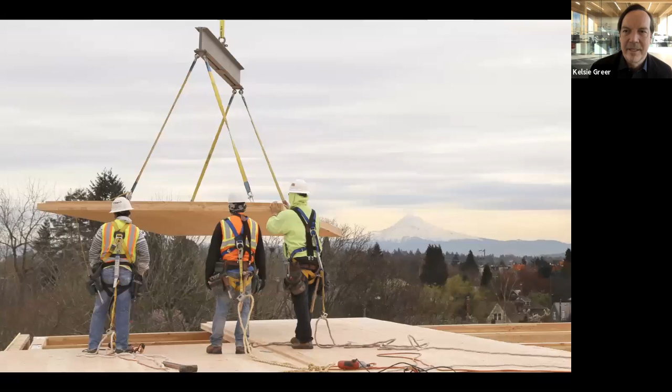This is our office that I'm in, you can sort of see the space behind me. When this was built, it was the first domestically fabricated cross-laminated timber office building in the United States. That was a really exciting opportunity for us to work in a material that is literally right outside our window. The panel you see hanging in the air is grown in the range you see in the distance, 3 hours south, fabricated and then shipped to Portland, where we assembled this building almost 4 years ago.

That connection between the kind of explosive growth we're seeing in cities and rural economic development is something that's really important to people in the Northwest, and I think is a big driver. When we think about mass timber, that's even sometimes bigger than the technical aspects.

For me, when I think about timber, it always sort of starts with the forests. The forests in many ways are a big important element to the future, and to some of the biggest challenges we face as a society relative to climate change, relative to rural-urban equity issues that I think we see in politics today, and relative to carbon sequestration.

Connecting the decisions we make around mass timber to sustainably managed forests, and really thinking about how mass timber, thought of in a wider context, in a global context, can address some of the biggest issues we face here relative to forest fires and more sustainable management.

This is something I've experienced very personally, not being able to go outside in Portland for 5 days because the air quality is just so terrible.

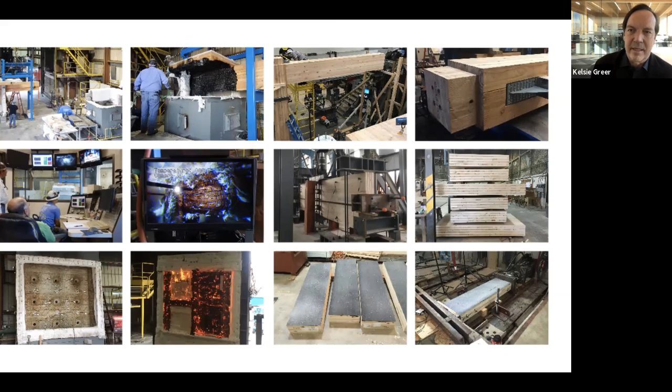And this is something that's now spreading across the US. I think one of the other things that was really important for us with Framework was thinking about this as a project funded by public and private partnerships. Like, how do we push the boundaries?

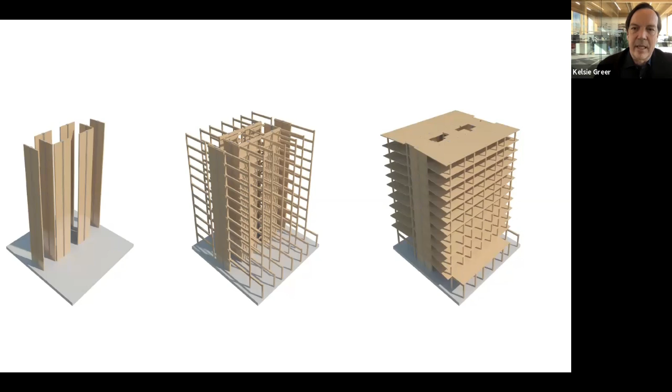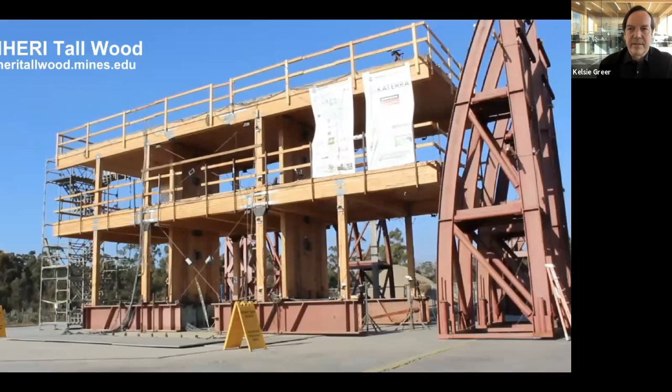One of the things specific to the West Coast was thinking about resilient design in timber. So we developed a whole technology, which we're still involved with right now. We're actually going to be doing another test next year, 5 years later, for post-tension resilient self-centering structures out of wood, because wood has a great, very high strength-to-weight ratio, and is a great way to address this issue in a major seismic zone.

And lastly, just that idea of a more virtuous cycle relative to thinking about forests, fabrication, construction. I think one of the big focuses that we've had lately is really thinking about the connection between mass timber and equity, and at this particular time that's really key.

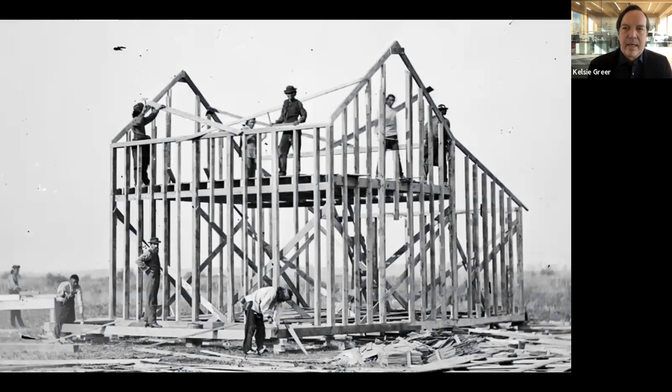I'll talk about that in one of the projects I'm going to go through. But for those of you that aren't in the US, I think it's really important to understand the context of timber in the US. So, in terms of where we've been, I've worked in Europe for a number of years and encountered the difference between the two. Actually, my mother's European, so I have that kind of connection there.

The U.S. timber tradition is quite different in that it's really focused on balloon framing, timber framing, and our entire supply chain is basically built around this way of building, starting in the 1830s. So we have almost 200 years of tradition and refinement of the supply chain relative to stick framing. It's very hard to compete against a stick frame structure using mass timber—it's actually kind of a different animal entirely.

But I think in the Northwest, in Portland, it's a really newer place, and within the last 100 years we've had old growth timber, so there was a different tradition, almost a massive timber tradition.

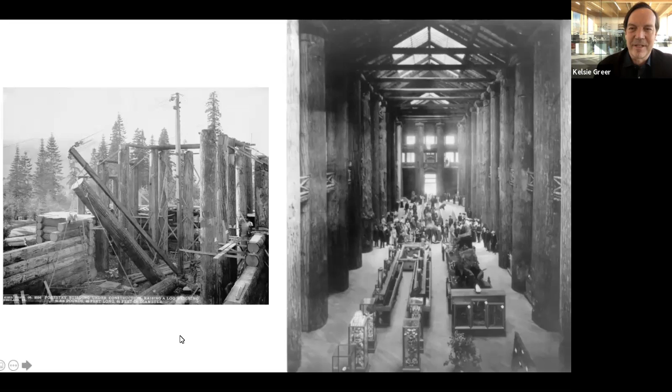But I think that tradition and connection to wood is, for me on a personal level, related to the fact that as I was growing up, I spent a lot of time at my great-grandfather's house. He was a scientist and built this residence completely out of timber. It was only a couple years ago that I found out—this is actually sitting on the East Coast of the United States—that he had purchased 2 boxcars of Oregon ponderosa pine, shipped them across the country, and had 2 Irish carpenters in Cape Cod put this house together.

But that house and the experience of it, the experience of timber, the connection—for me, you could still see the fingerprints of the carpenters on the ceiling and the walls—was really something that I think motivated us as we got into doing these buildings.

In the last 5 to 6 years, Lever's done, I'd say, 8 or 9 timber buildings. They're not all purely mass timber—they're always in a way hybrids, and that experience is really key.

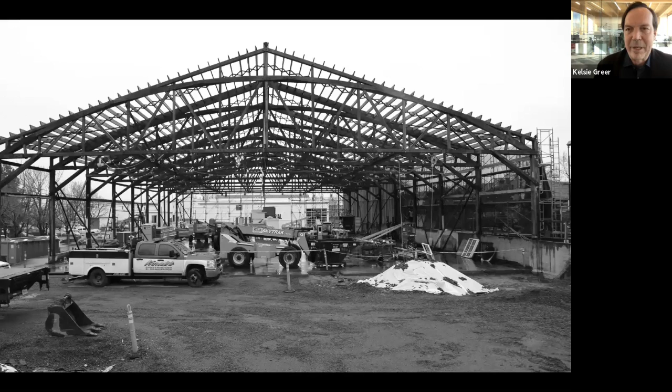So I wanted to step through some of the projects we're involved with that use timber in a variety of different ways. This is one we just completed about a year ago, which is really restoring one of those timber frame, stick frame buildings. These are 100-foot spans—2 warehouses in Portland, about 60,000 square feet total, around 6,000 square meters. I think what was fascinating to us is that the kind of structures you see in these buildings are really not necessarily achievable with the current code in terms of their lightness and efficiencies.

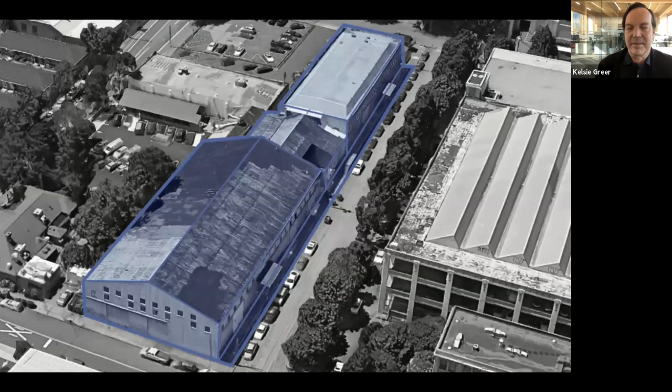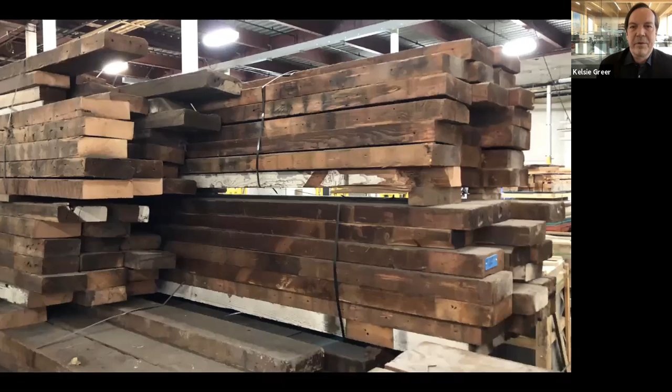So it was an opportunity to restore and put together this factory complex that was built completely based on efficiencies to manufacture hay balers during World War II. This building had been filled up with all types of mezzanines and things over its life cycle, over 60 years of work, and as we stripped away all the layers, we pulled out over 5,000 linear feet of virgin 4x12 timbers and more.

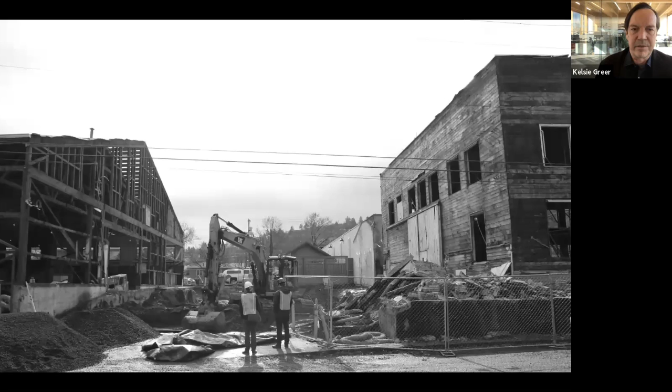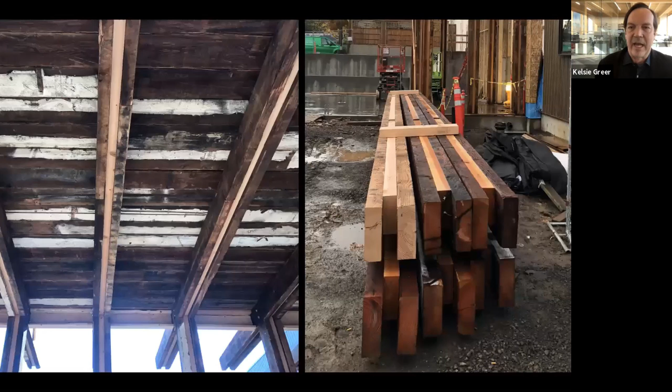And we thought, could we use that timber to rebuild a connection between these 2 structures? As we took the thing apart, we thought, could we take that timber—we had so much of it—and use it for the columns, the floors, and then actually remanufacture it on site? So we worked with our fabricators to create what's called a screw laminated timber structure—a simple mix and hybrid of one new solid piece connecting and bridging the other pieces together.

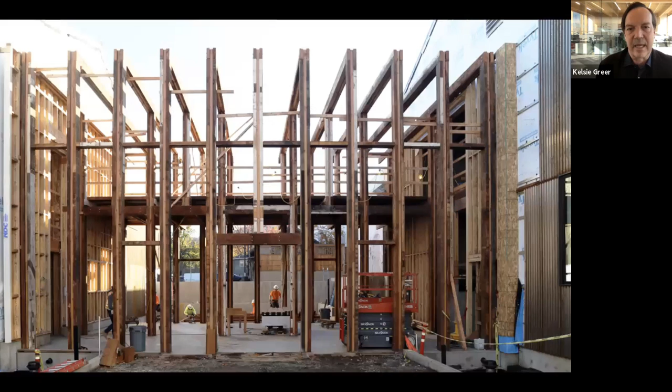So you can see this bridge connector, which is both contemporary and also sort of ancient. This is old growth wood that is being respected, and we put it all together. It had been painted white and black, and then we sandblasted it all in one place, just like we've done with the old buildings, but this is a completely new structure.

So some images of that, and then some views of this connected. For us, that idea of restoration—it was really great to hear that idea that you can do really incredible architecture within the context of existing buildings if you can rethink them. And I think there are so many timber buildings that have that opportunity.

That's something we're personally incredibly excited to explore, and we're doing that in a number of projects. This project, Red Fox Commons, is for us both contemporary and an opportunity to preserve these really phenomenal historic structures.

You can see the truss structure. One of the key things we did from a design point of view is really restore it. We added clerestory skylights for north light, and a mezzanine engineered on the lower level out of mass timber, then reworked the structure seismically with new fenestration. So it was a complete transformation, literally just the structure, and we're completely reimagining the entire experience of these buildings.

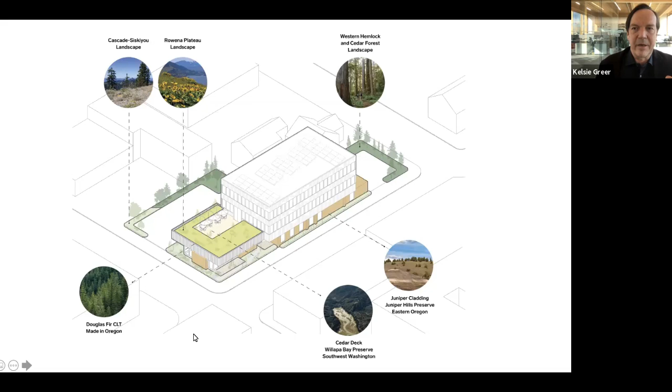That also played out in the facade and the landscape, where we were very targeted about how we could tell the story with the building. These are some images of that convening space being structured. We were looking at using domestic 7-ply CLT to span that space, and we had limited floor-to-floor heights.

On top of that is actually a roof deck planted with seedlings that come from their landscape. You can see the cantilevered CLT and the overall building as it stands. A huge amount of work was done to rework the structure, but you can get a sense of the scale.

Putting big, huge green roofs on top of cross-laminated timber is something we've been able to do and work through, making sure we have really robust waterproofing and thinking about expansion and all those types of things. That's a really big part of any kind of innovative endeavor, really understanding where you need to work technically on the details. So some of the views of that building.

One of the things we're always looking for in every project, and I think this is what it means to be an architect, is to think about what you can innovate on that creates a richer experience for the inhabitants.

In this building, one thing we were excited to do, which has been done in other parts of Europe, was to use this wood window wall, sourced originally in Oregon, structurally. The mullions actually support the 15-foot cantilever of the CLT. It's a structural element you couldn't do as easily with an aluminum system, so there's an integrated approach to working with it structurally.

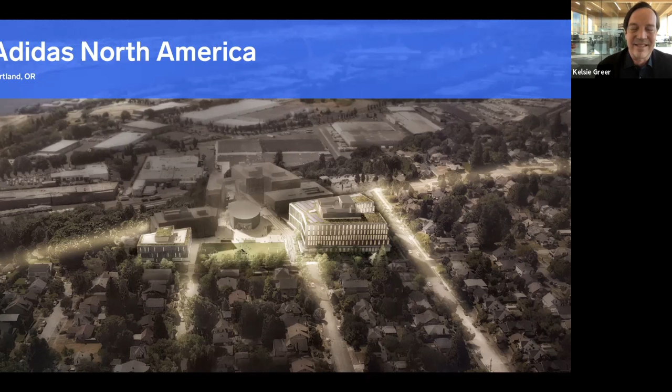It's really two buildings—you can see the north building on the right and the south building on the left, sitting on top. The south building sits on an existing parking garage, and the north building has a 600-space, 5-story parking garage underneath it. One of the key things Adidas wanted was to build this quickly and economically.

We won this project as a result of a competition. At the time there was interest in mass timber, but it wasn't decided that's what they wanted to do. Going through a series of studies, we came up with two systems.

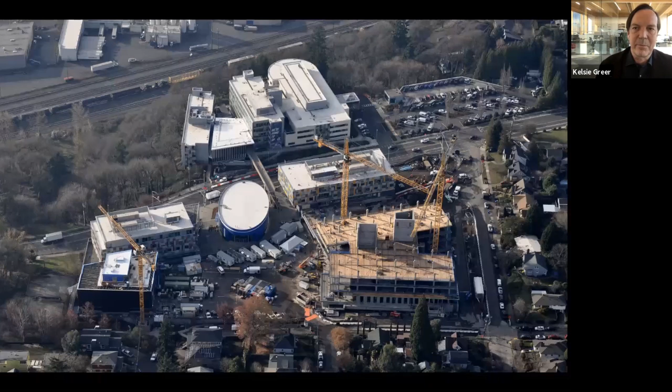On the north building, we came up with a hybrid system of precast columns and girders with a CLT and glulam cassette that fits into it. On the south building, because it sits on an existing parking garage, it's an all CLT and glulam structure that's lighter—you can see the section here.

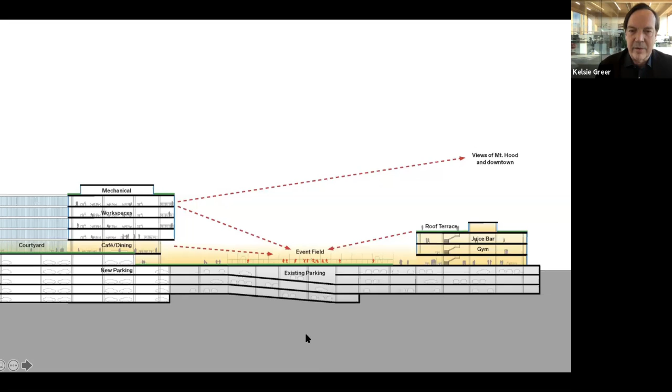The gray is the existing parking. On the right is the new glulam and CLT building, basically planted on the columns of the existing garage. On the left is the hybrid precast and CLT structure sitting on top of an all-precast parking garage—images help explain how that works.

One thing that came out of it is we were able to accelerate construction of this project by over 3 months by prefabricating all these elements, including the structure of the parking garage.

I think what we came to, working with our contractor Turner and the structural engineer at KPFF along with the fabricators, was a system we hadn't seen before—doing a traditional precast girder, plank, and column structure for the parking.

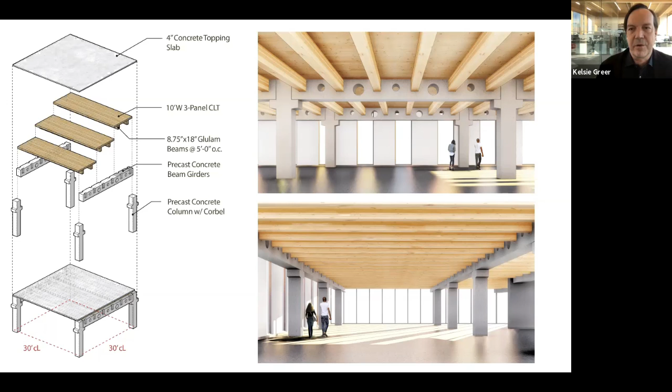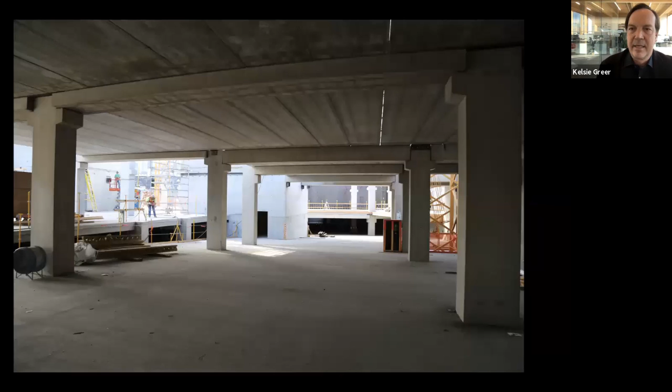And then when we got out of the ground, we said, well, could we generate and develop a custom girder that's perforated so it would allow us to run utilities through the structure and maintain this really honest and simple system. So you can see this is the kind of classic parking garage system with these big planks that's below grade. And then when we get up above, this is sort of what we have.

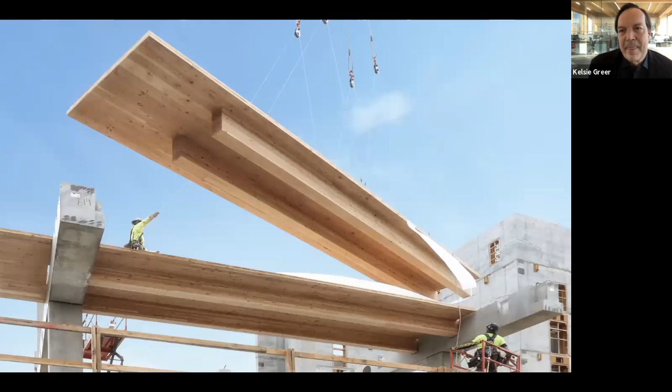This very straightforward system where you have these perforated large girders, the precast columns, and then what we call CLT double Ts, or actually double T CLT, if you know the precast double Ts they use for parking garages. So these become assembled on trucks, we stack them 4 high, and then we're putting them together in kind of a ballet where we're working with the precast erectors and also the wood cassette.

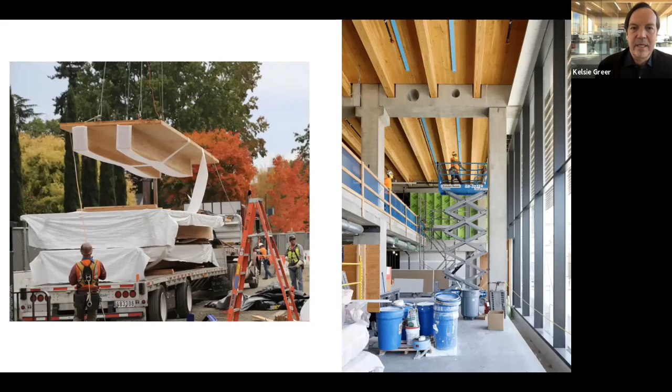So in 2 months, we were able to assemble 180,000 square feet of core and shell structure. It was really, really fast, and it was done during the winter. So Turner did an amazing plan looking at moisture management. We had a whole protocol about that because we were basically doing this and dealing with rain and all those things, understanding how we could do the pour.

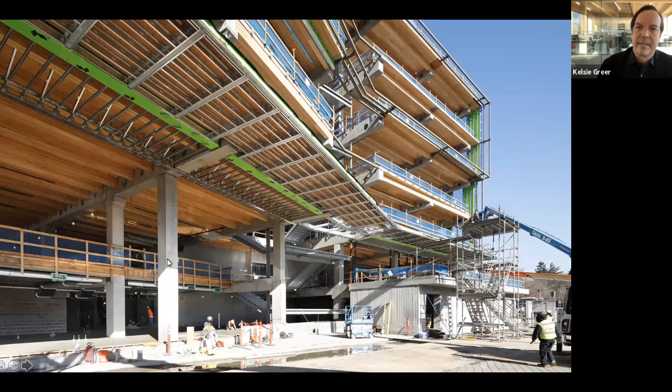So you can see here also the ability that we had with these systems to actually cantilever 15 feet with the precast. So then we could actually sit the CLT onto those pieces. We were also

And for us, this really resonated with the Adidas brand. Adidas, I think, has a real focus on materiality and the subtle treatment of materials to create interest and richness.

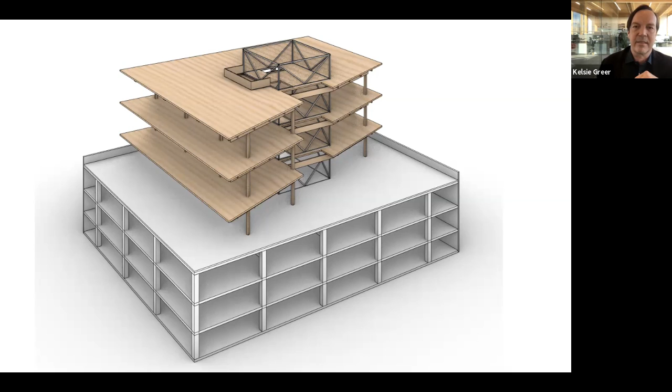And one of the things that over the years we've gotten interested in is how simple can we make the details and the connections, because we found the complexity of these details is really what drives a lot of cost and complexity. And we were interested in thinking about, in a way, eliminating the need for steel or the need for these elements in the structure.

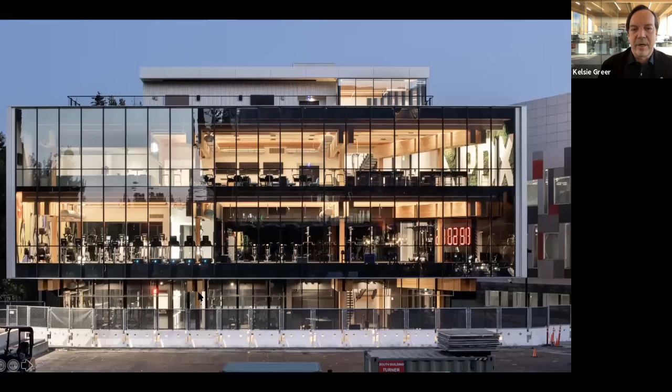And so in this case, we developed this building where actually, if you go back one, you can see the only steel connecting these elements is this steel pin up here, and then everything else is stacking. And you can see this is what's almost complete: the gym, the structure.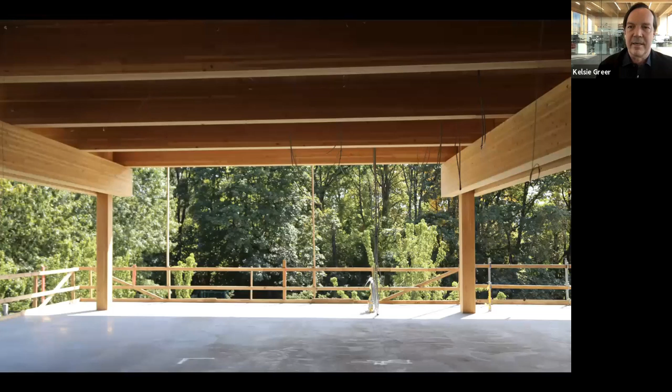So these beams are just sort of hoisted and then basically pushed on one side or the other and then screwed in. And then the other elements are stacked, and that stacking allows us to actually run mechanical.

So it's a very straightforward system. There's a lot of timber in this building. In a way, it's choosing more fiber over complexity, and probably given the state of the manufacturing supply chain in the United States, that's probably not a bad choice at this point.

I think that's changing rapidly as we have more folks coming online who have the capabilities to do more complex connections. So I'm going to talk about Meyer Memorial Trust, which is another project that just finished up.

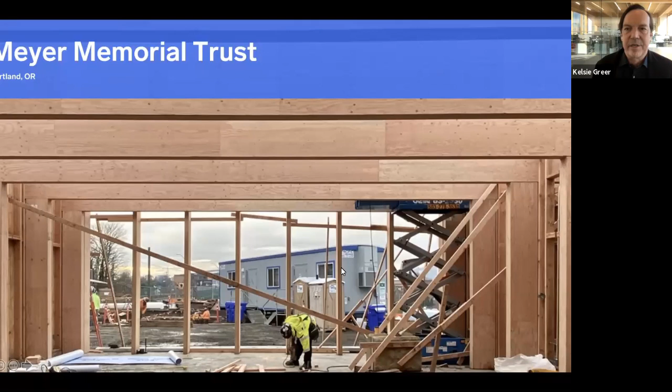Meyer Memorial Trust is the largest private foundation in Oregon, really focused on equity. They were located in downtown Portland, and they relocated to North Portland, which is historically the Black community in the city, one that was basically decimated through urban redevelopment. They're really rerouting their organization to focus on that community.

They wanted materials that came from all over Oregon and really connected the state. One of the things we were interested in exploring is a new material called mass plywood coming out of Lyons, Oregon. The convening space we created here is made completely out of mass plywood, as is the pre-function space on the ground floor.

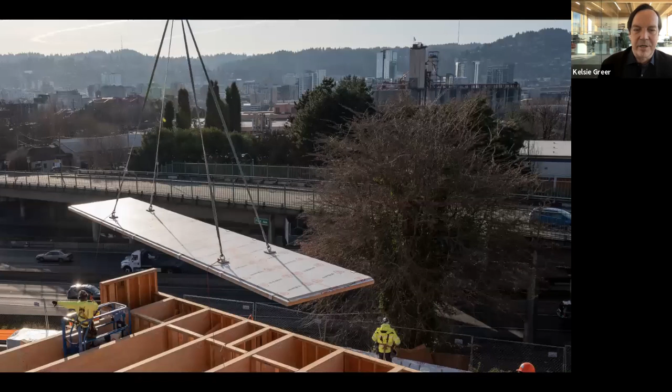So I talked about the mullions in the Nature Conservancy. This is really the entire structure and mullion system, and we're able to prefabricate all these elements off-site.

In the main space you can see we're using it for the columns, the beams, and the roof. It just comes together, and that's connected to a new landscape that looks back at downtown city. This is right at the freeway — very straightforward detailing, but really an expression of the materials.

These columns on the exterior also become the mullion system, and you can sort of see that here.

This sort of collaboration and use of this product really came out of work we've done with Freres. We did a number of pavilions, early work, almost four years ago, just exploring the potential of their product even before it was put into any building.

So that idea of connection, of really thinking about building a building that empowers people not necessarily represented in timber — over 40% of the contractors on this project were minority woman-owned businesses, and over 23% of the design consultants we used were also what we call COBID in Oregon. That issue of equity in mass timber is something really important to us, and important to the future of a more inclusive approach to thinking about building.

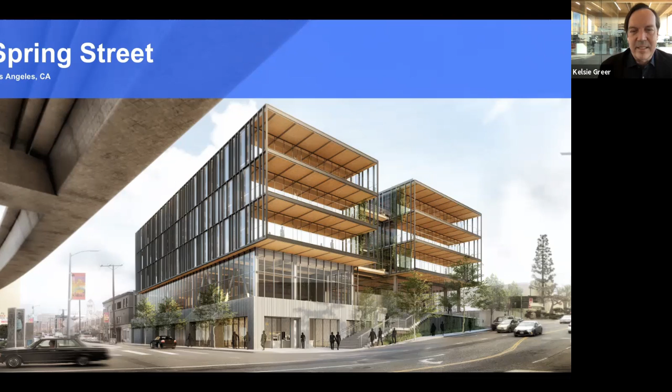LA is a big city. It's really complex to do work there and get permits there. But it's also an amazing place that I have a personal connection to — I'm actually from California originally, but I now live in Oregon.

One of my favorite buildings in LA is the Bradbury Building. You might be familiar with it from the Blade Runner series. But what's fascinating is the experience that I didn't think of — it's basically this incredible wood structure.

And it's wood and cast iron, with these beautiful black cast iron columns. We were thinking of ways we could think about that structure. This is maybe 45 minutes from my house, Oneonta Gorge outside of Portland, and thinking about how we could bring landscape into a steel and mass timber system.

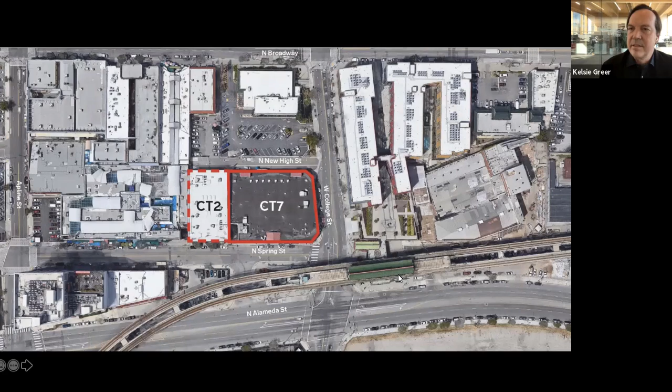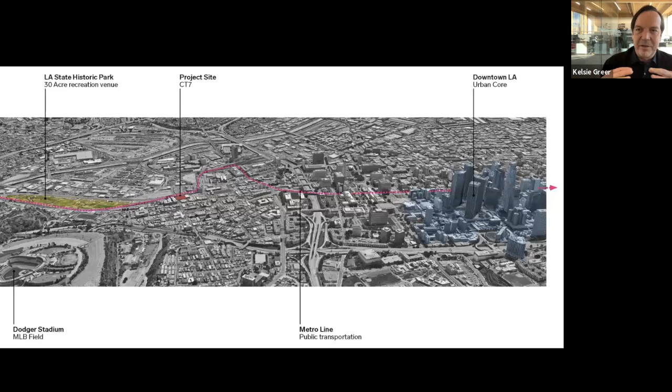So this is the site. This is actually the Chinatown Metro stop, literally right next to this new phenomenal infrastructure that LA's been building. But it's also in a kind of mid-zone between the downtown and the suburban, so there's sort of a middle ground, and that's interesting to us.

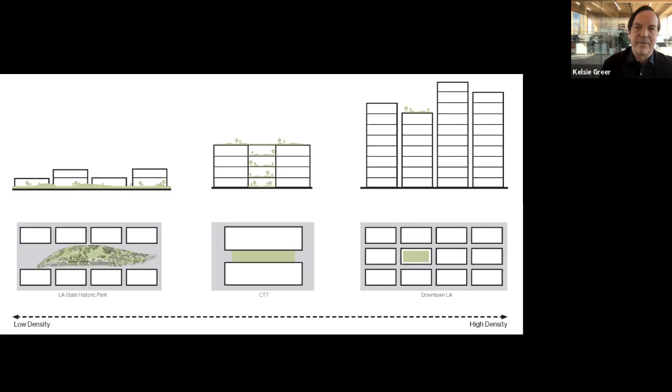When you think about high rises, sometimes you think about roof decks, suburbs, these green landscapes. What is that middle ground? This is pre-COVID, and we're thinking, well, could you bring landscape into every level of this structure? That's sort of what we focused on.

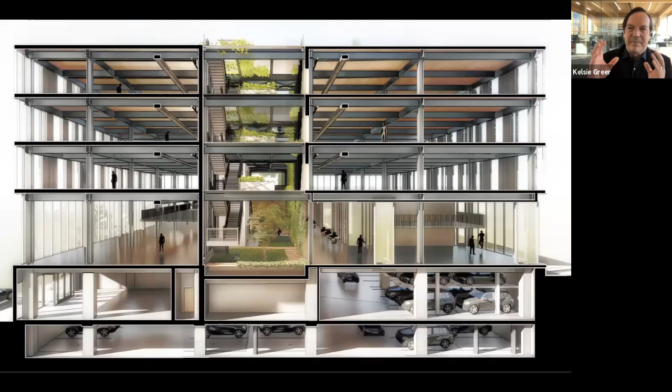We worked with James Corner Field Operations to really think about how the landscape can be woven through the building at all levels, so that in a place like LA, with this really amazing climate, you could leverage that climate to create these outdoor spaces. So we created this straightforward outdoor stacked garden with circulation, and then these buildings off of it.

Now it's actually sitting on an existing garage, so we're piercing that with the steel, and then we're using the cross-laminated timber for the floors.

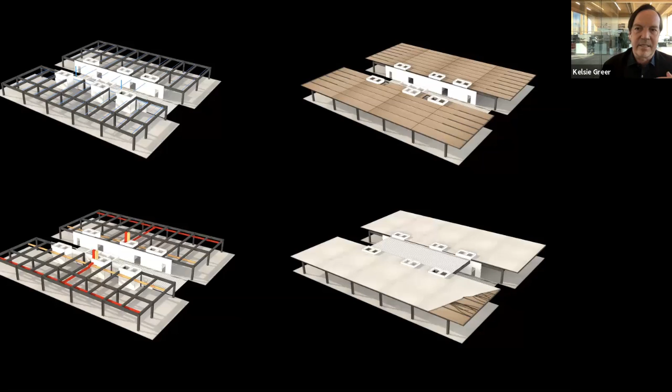Some of the systems we're looking at - one of the key things for us is understanding very early on, these are schematic design level studies of how the systems are being distributed in the building. We need to design those in concert with the building to ensure people are actually able to experience this timber without conduit and ducts running everywhere. That's really critical for us to have that integrated approach.

It really comes out of my background when I worked in Switzerland for a number of years at Herzog, doing museum work, really thinking about all the systems in an integrated way.

The last project I'm going to hit on is a competition we participated in, an international competition for the Anthony Timberlands Center at the University of Arkansas. It was a really exciting opportunity to compete with a number of world-class firms, but also explore some of the ideas about regional timber that we've focused on in the Northwest in a completely new environment.

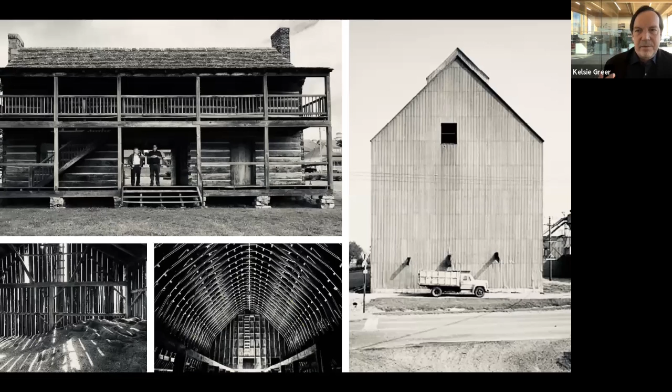This is in Arkansas, and what's fascinating about Arkansas is it's about 65% forest, quite similar in a way to Oregon - not something I'd thought of, that was sort of my bad, not really understanding that. But they also have this rural tradition of building out of wood, incredible barns. This is the oldest wood building in Arkansas, not old by European standards, but I think it was from 1850.

This sort of shotgun house experience, and then these amazingly efficient, simple barn structures you could see on the left, and then these grain silos that sort of dot the landscape.

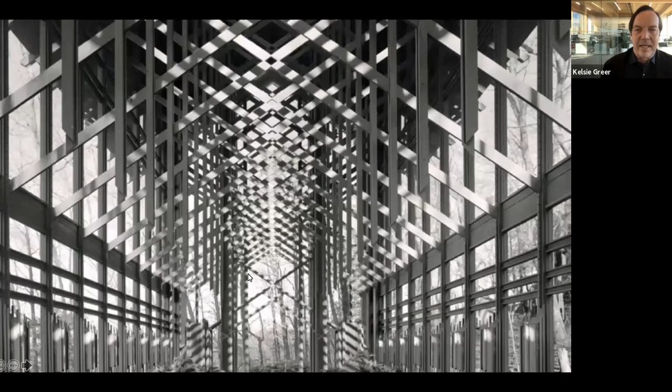But I think maybe people aren't as familiar that Arkansas also has an incredible contemporary architectural pedigree. Fay Jones built this building, called Thorncrown Chapel, right close to the University of Arkansas in Fayetteville. An incredible structure, but it's built out of 2x6s, connected in an incredibly thoughtful and simple way.

That idea of taking timber framing - I would almost say this is like the high Gothic of the US tradition of timber framing - and thinking about what that means for the future and what that means for mass timber.

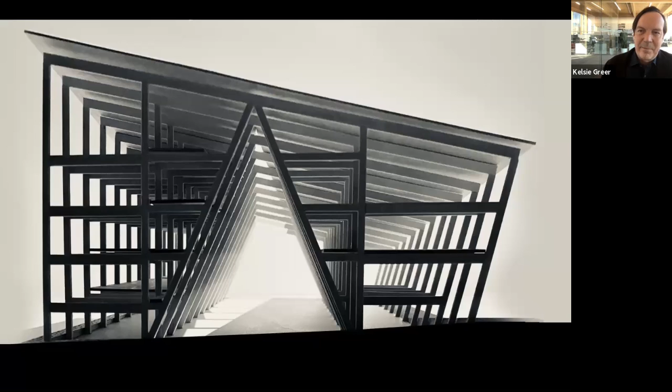So we were really interested in thinking about regional sourcing for southern yellow pine, and we came up with a scheme where we're thinking about those traditions with Fay Jones to do a building.

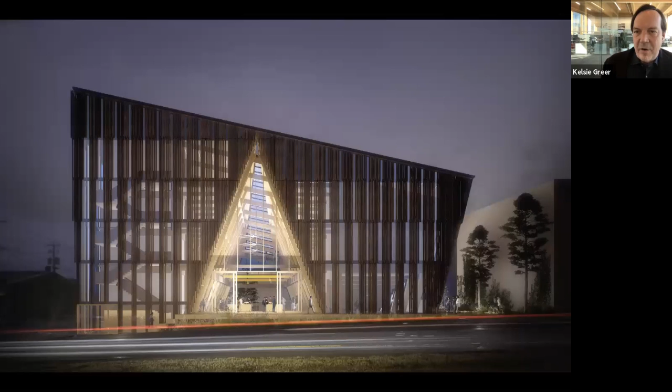And I've neglected to mention the program. It's basically an innovation center for the architecture school focused on new materials, primarily timber, thinking about how we could build using stock glulam that's currently manufactured in Arkansas, and create a space that evokes that tradition but also brings something more to the way you think about a fabrication space.

I won't spend too much time on this, but one of the inspirations for us was thinking about the fact that in architecture school, oftentimes the shop is relegated to the basement or isn't necessarily part of the heart of the school.

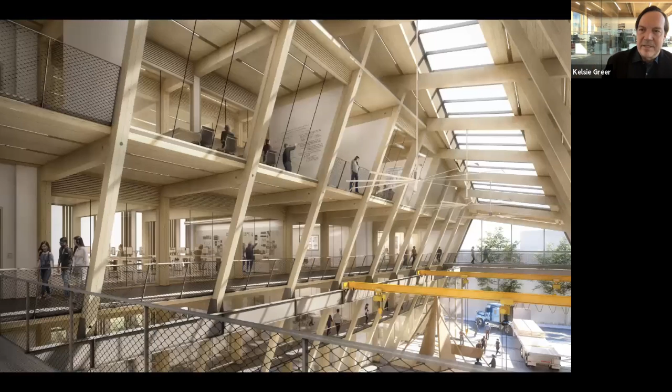And we wanted to think about making that fabrication hall in a way a place of making that really connects all the studios, the labs, the auditorium, and we designed that around this fabrication hall where the spaces actually look down into it.

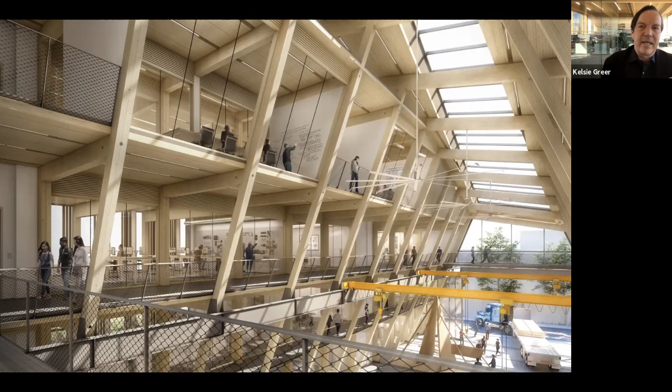The whole structure you see here was actually made out of stock glulam elements. We started with the suite of stock glulam products that were available and put together the structure with that in mind, also looking at using glulam for the floors. We talked with a local fabricator in Tennessee about the way we're thinking. In a way we're starting almost like a chef with the ingredients, and we're not being governed by that, but using that as the starting point is always a really exciting journey and really informs the way we think about design.

So this was a really wonderful opportunity for us. Unfortunately we didn't win, but it feels okay, because the winners were the Pritzker Prize winners of last year, so we wish them luck. It was a really exciting opportunity to explore a lot of ideas that we continue to work on in subsequent projects.

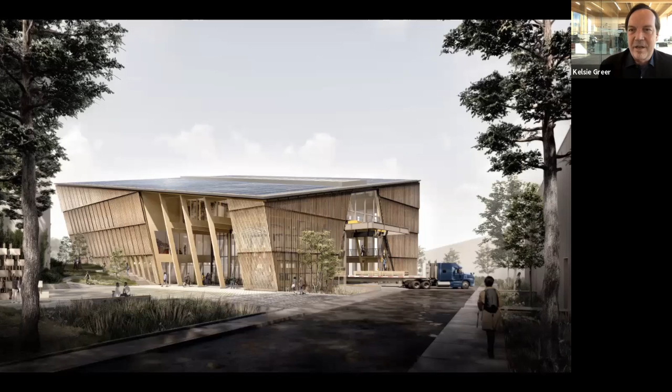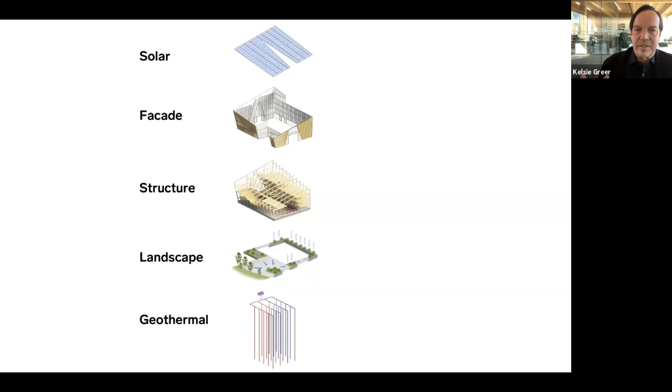Something else we were working on was an integrated approach to net zero in the building, in terms of the shape, the form, and the orientation with solar and the facade. We looked at all these pieces as a whole, and these are just some of the key diagrams. We had the opportunity to collaborate with Transsolar, with Thomas Auer, to think about what it would mean to truly do a net zero or climate positive timber structure.

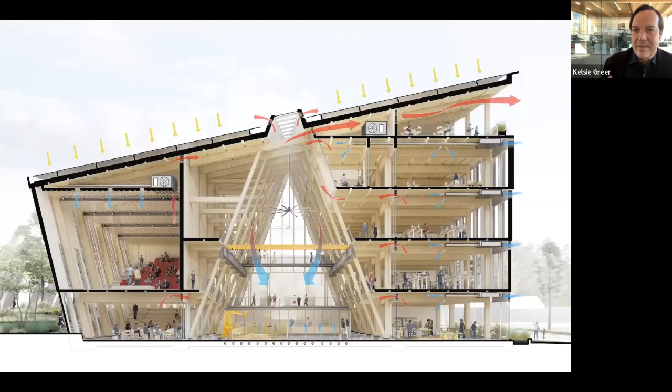These are some of the technologies we developed, using geothermal, using this main atrium space in a way as the lungs of the structure and the building as a whole, to create a building that can work in this almost tropical environment with different mixed modes. That was a really exciting opportunity to develop ideas that we're continuing to explore in current work across the West Coast and the United States.

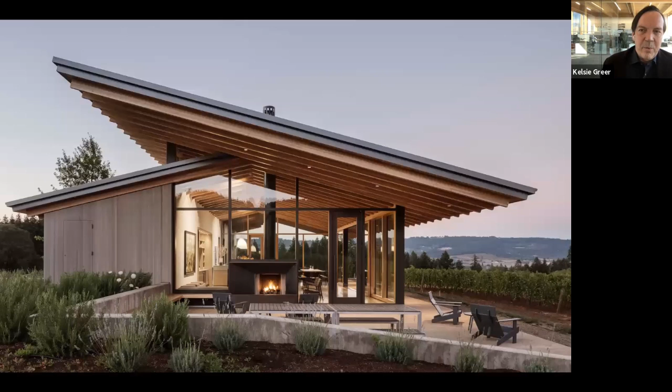It's not incredibly well known, but I think that continuity, that connection to local innovation and materiality, is something we think is incredibly relevant and important when thinking about global solutions to some of the biggest challenges we face collectively. Our work is very much about this place, the Northwest, but also about trying to create models that can be used elsewhere to think about how to build more sustainably, how to build in a way that addresses systemic issues around equity. I think that's something that inspires us every day.

I'll end with this quick quote: 'Think well to the end, begin with the end in mind' - Leonardo da Vinci. What does that mean for us? It means that instead of a linear process, you're really thinking about what the end goal is, what result you want from the place you're making, and how that relates to people's needs. You can think of those in parallel and come to something that, when people experience the building, they can physically understand some of the key issues we're trying to address as architects and as human beings. So thank you.

So I'm gonna... Greg, do you think I should stop sharing? Is that easier?